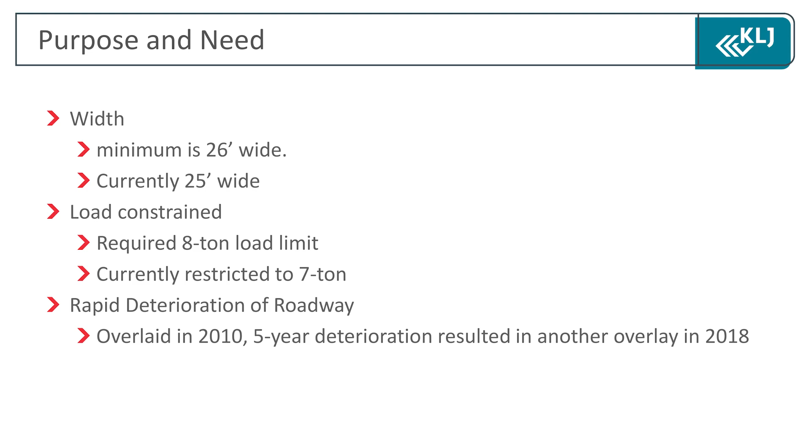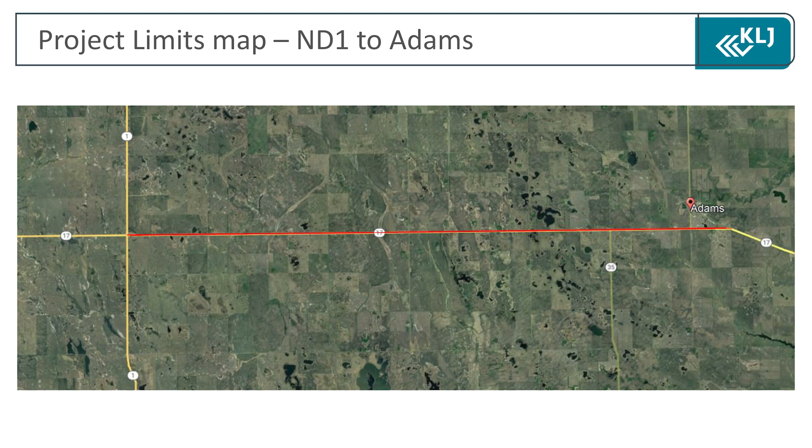The project the DOT has identified along ND17 is from its junction with ND1 east to the intersection of County Road 11A going to Adams. This roadway project mainly consists of widening the roadway to 35 feet, adding 10 inches of cement stabilized base material, and 3.5 inches of asphalt surface.

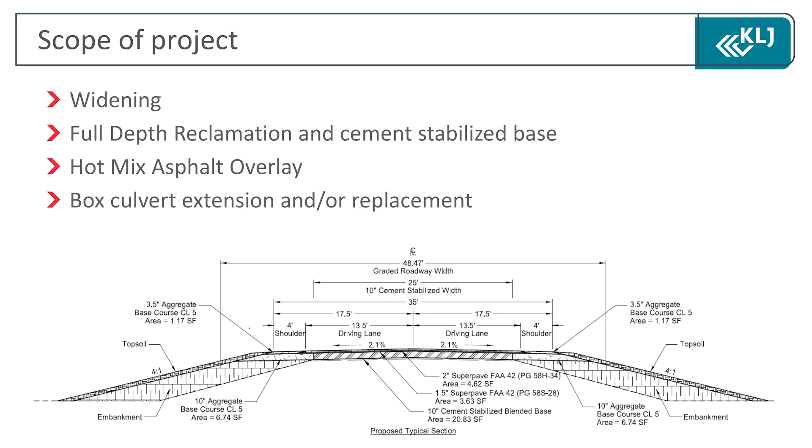Widening will result in work happening outside of the right-of-way. However, we do not anticipate having to buy additional land for the roadway. We expect that the work outside of the roadway right-of-way will consist only of approach road reconstruction to accommodate the widened roadway. This will take place through North Dakota DOT's Rural Approach Reconstruction Agreement, or RAMA for short. You can find a brochure discussing the landowner's rights, privileges, and obligations in the additional materials link next to this presentation.

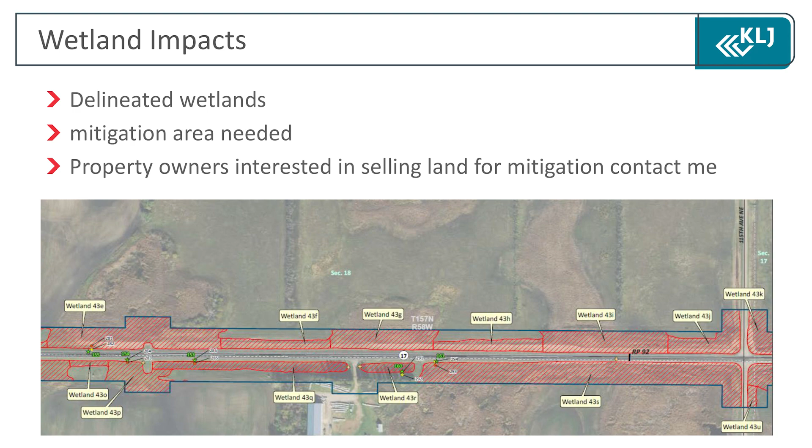This project also needs to find earth material to widen the roadway. I encourage any property owners along ND17 that would be willing to sell dirt material for this project to contact me.

KLJ Engineering performed a traffic operations study of this corridor to identify any further operational needs this segment of roadway may have. Firstly, the level of service indicates how busy a roadway is, level of service A being the least congested, and level of service F being where there are so many cars that the roadway is unable to function. Our study indicated that this roadway functions at level of service A at all times, both now and in the future year of 2045. We also reviewed roadway elements that would warrant right or left-hand turn lanes. Both resulted in the determination that turn lanes are not required on this project.

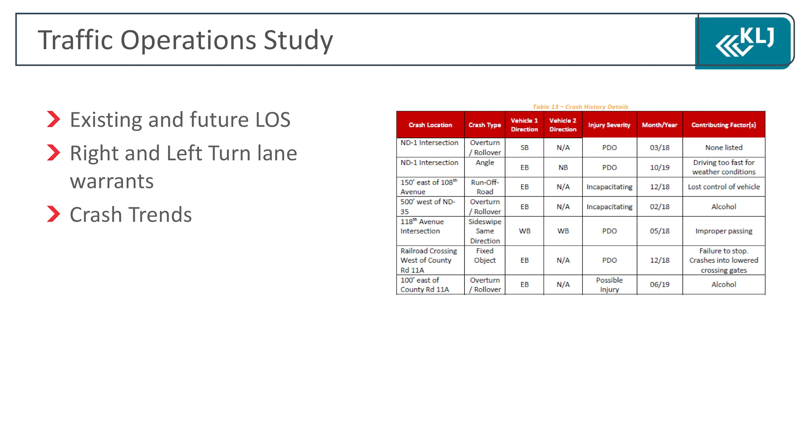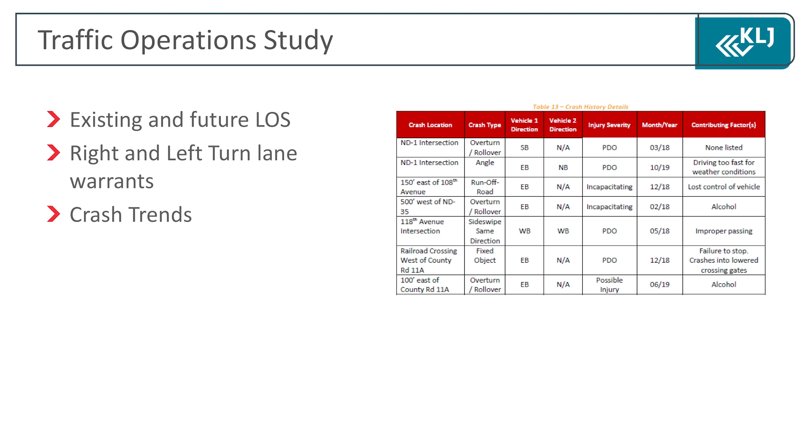Next, we reviewed collision data to identify crash trends that could be mitigated with changes to the roadway. Over the 5-year study period, there were very few crashes and there were no crash trends identified. Lastly, roadway geometrics were reviewed. This identified that County Road 11A intersects ND17 at a 36-degree angle. National standards indicate that where practical, roadways should not intersect at less than a 75-degree angle. To remedy this, County Road 11A would have to be realigned.

The decision to include this work in the project has not been made yet. This decision will be made by the DOT at the end of the environmental permitting process. Factors that will influence the decision include crash history, traffic volumes, and public opinion. The traffic operations study has shown that both the crash history and traffic volumes do not indicate a need for the improvements to this intersection. But if you have concerns regarding this intersection, please share those with me. My contact information will be at the end of this presentation.

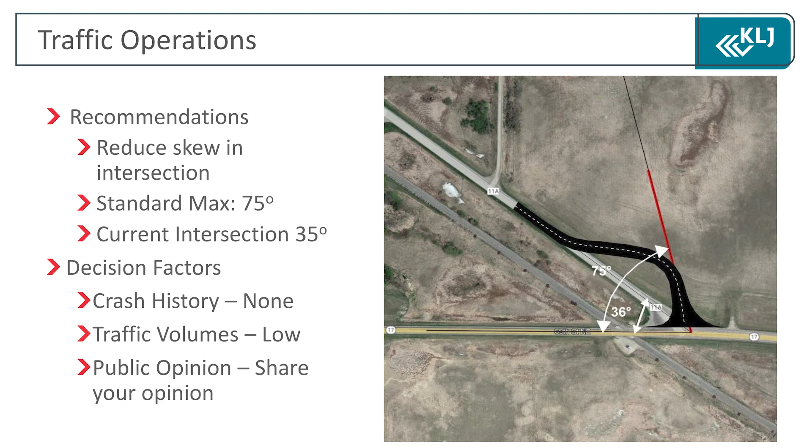This project is moving forward to have a completed plan set for bidding by November 1st of 2023. Per that schedule, we anticipate this project completing the bidding process by March or April of 2024, with construction beginning in spring of 2024. Please note that these dates are preliminary and are subject to change.